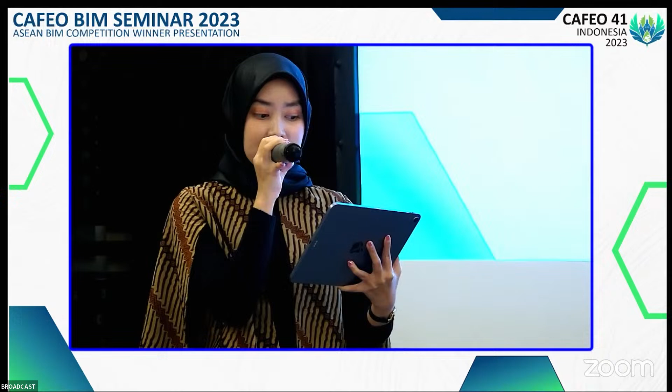Ladies and gentlemen, now we are moving to the opening speech from Mr. Insinyur Bambang Guritno as the General Secretary of PII, Persatuan Insinyur Indonesia. Please welcome Mr. Bambang Guritno.

Bismillahirrahmanirrahim. Assalamualaikum warahmatullahi wabarakatuh. Very good morning to everybody, distinguished guests, participants of the BIM competition, and especially our colleagues from ASEAN countries.

I'm very delighted to stand here on behalf of the President of PII, and also, I guess, the Civil Engineering Chapter of PII, who was supposed to be here, but unfortunately there are many activities taking place at the same time in different rooms. Also, I have to apologize that I came here a bit late, because I had to be a witness for the signing of the MOU ceremony with the China Society of Engineers.

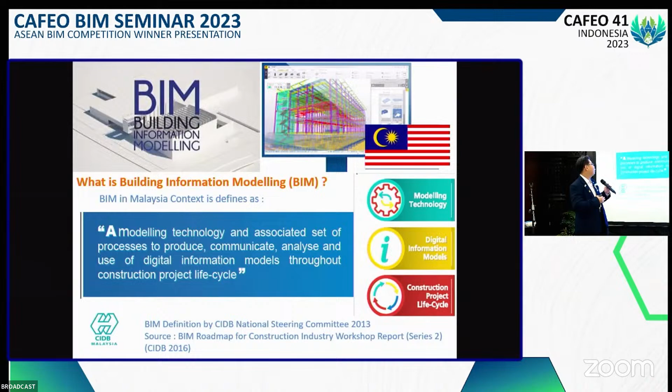So we use BIM for the whole project life cycle. In Malaysia, we have our Construction Industry Development Board, which has a strategic plan for the development of our 4th Industrial Revolution, and BIM is one of the 12 emerging technologies in this strategic policy.

Besides our Construction Industry Development Board, we also have JKR, our Public Works Department in Malaysia, which has strategic plans to adopt BIM at the government level. The government has mandated that for government projects of 10 million and above, they will start with 50% from 2021 needing to adopt BIM, increasing 10% every year. So this is our Malaysia government policy.

Although we have so much policy, our Construction Industry Development Board did a survey showing that BIM adoption in Malaysia in 2021 was only 55%. Compared to the US, UK, Canada, Denmark, Singapore, and Hong Kong, who are all between 70 to 80%, we are still considered low. Our Malaysia government actually wants to achieve at least 80% BIM adoption and above, so we are still considered low compared to those developed countries.

So this study comes in timely, because we want to establish the critical factors from technological, personal competency, and organization's commitment towards company readiness to adopt BIM. This is the purpose of the study - we want to see what factors are affecting BIM adoption. So why is this study important? Why do we need to do this study?

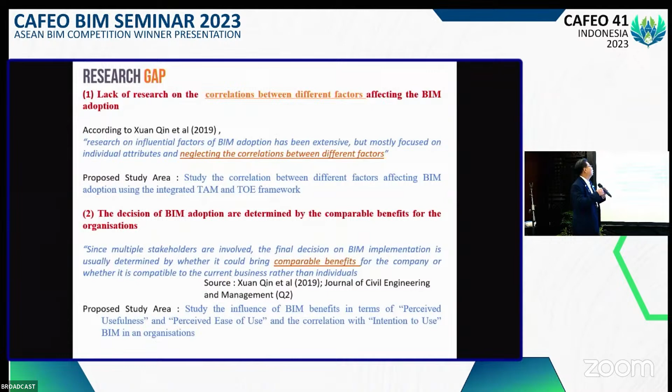So this is where we also found that decisions to adopt BIM are usually determined by comparable benefits, whether BIM benefits the organization. So we also studied the benefits of BIM, looking at the correlation between the factors and the benefits.

This study is considered a cross-sectional study. We are only studying this at the current time, 2023. The target respondents are architectural, engineering and construction stakeholders in Malaysia.

We have done a lot of literature review on the benefits of BIM, and from various reviews we can conclude that the benefits of BIM can be categorized into three categories: productivity and design, project management and constructability, and facilities space management and project life cycle. These are the three main benefits.

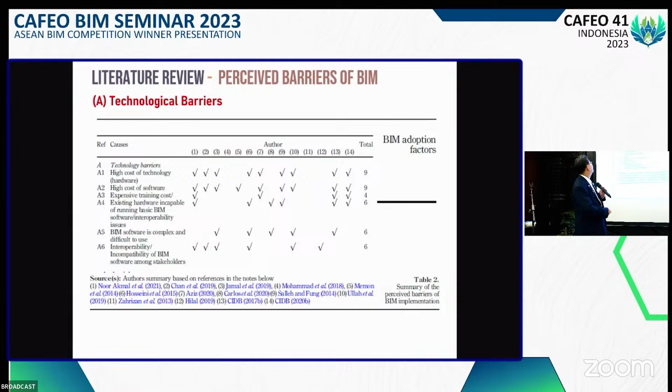We also looked into the barriers - why people do not adopt BIM. From the literature review, we see that the barriers are mostly technological, people, and process barriers - lack of knowledge, organizational barriers, resistance to change, workflow issues.

So the barriers we identified are technological, people and process. This is also consistent with the study by our Construction Industry Development Board, who identified the same three categories of barriers - technological, people and process - in the adoption of BIM.

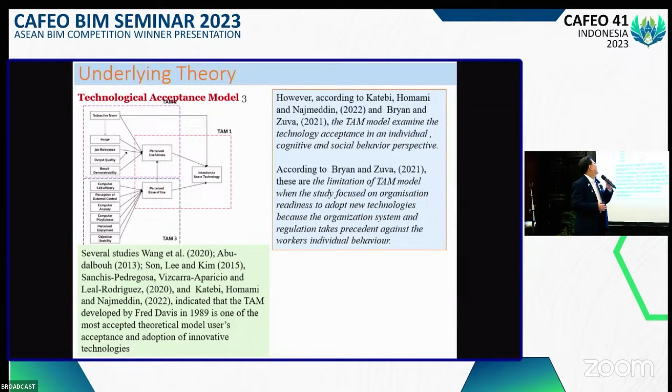But which barriers are more important? How are they related to company readiness to adopt BIM? That is where we wanted to use established models. We have two established models in this study: one is the Technology Acceptance Model, and another underpinning theory is the Technology-Organization-Environment framework.

But both of these models actually have their own shortcomings. So in this study, we combined the two underpinning models into one new conceptual framework, which we call the Technology Acceptance Framework. This framework can be used to study any new technology adoption.

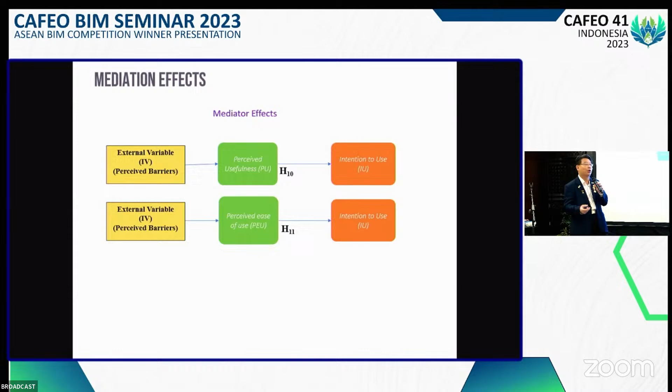So we conducted a hypothesis study to find the correlation between these factors and whether companies are adopting BIM based on these factors. We also did mediation analysis for perceived usefulness and perceived ease of use of BIM - whether BIM is easy to use and whether it's useful. So we will study this relationship.

This research is basically a quantitative study where we conducted it using a questionnaire survey, and we collected more than 185 questionnaires from various respondents - architects, engineers, and consultants. Our respondents also include clients, consultants, M&E, and QS. So we took in all construction stakeholders, and the analysis was done using software called Partial Least Square Structural Equation Modeling, or PLS-SEM, to do the correlation analysis.

From the respondent data, you can see that most respondents are in management - more than 60% are general managers and management level or above. They are the decision makers, and more than 53% have more than 20 years of experience. So the respondents are people in positions to make decisions about whether to adopt BIM in their company.

The result from our study conducted in March and April this year shows that 59.5% of respondents actually adopted BIM in their organizations. This is very consistent with our national government study, where 2016 was 17%, 2019 was 49%, and 2020 was 55%. So 2023 at 59.5% is very consistent with what the government has reported over the years - we only have 3 official reports from the government.

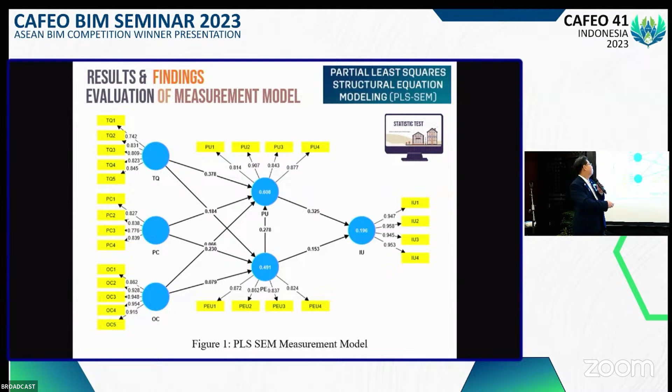We are looking at the correlation, but before using our model, we want to test whether it is reliable and valid. For reliability of the data, we look at Cronbach's alpha test and convergent reliability. Cronbach's alpha for all values are more than 0.8, so they have very good internal consistency.

We also tested for composite reliability, and the values from the statistical analysis show that all values are more than 0.7.

So the internal consistency are acceptable. And then we also make sure that the convergent validity of the construct are related positively to the same construct. So all the AVE values are more than 0.5. So the convergent validity are accepted.

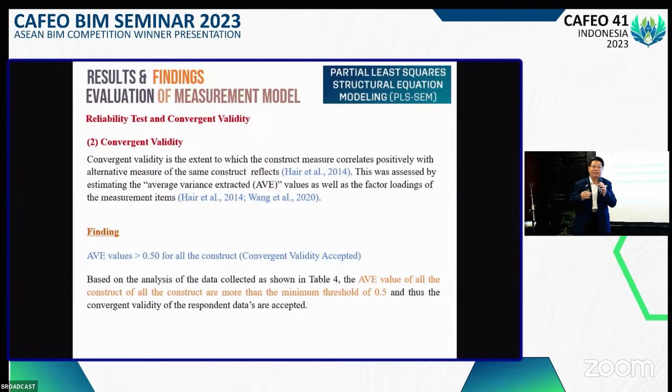And then we also look into discriminant validity. This is done by the HTMT value ratio. And from this, we find that all the HTMT values are less than 0.9, meaning that the discriminant validity of the model is being accepted.

We actually look into multicollinearity issues, whether the models are measuring the actual construct, or they actually measure another variable. Is there any bias or not? So from here, we use the VIF model, variance inflation factor, all are less than 3.3. So there's no common method bias. So the measurements of the construct are not biased.

So that is where we test the validity. So once all the validity and reliability are being tested, and we find that the model are reliable and valid, then we continue to do the hypothesis testing to test whether there is any significant relationship between the factors towards the company's readiness to adopt BIM.

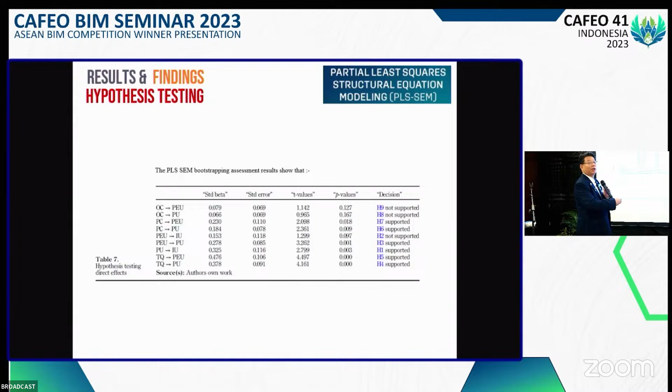So you can see not all are supported. Some of them are supported, some are not supported. And then we do the mediation analysis to see whether there's any mediation between the perceived usefulness and perceived ease of use.

So finally, from the analysis, we actually find out that technological quality and personal competency have more significant relationship with the perceived usefulness and ease of use. And perceived usefulness have a significant relationship with the intention to use.

Perceived usefulness also has a partial mediation of technological quality and personal competency towards the company's readiness or intention to use BIM.

Organization's commitment does not have significance to the perceived usefulness, and perceived ease of use is not significant in the company.

So why is the study very important? It's because this proposed new framework can be used not only to study BIM, but any new technology, AI, IoT, ChatGPT, IBS, modular construction. You can use this conceptual framework to do any study.

So for the promotion of BIM, now we know that technological and personal factors are more important for the adoption by the company. So we should focus more on the incentive for BIM software and hardware, as well as the training to increase the personal competency.

And we also know that the benefit, because the perceived usefulness is important, so we need to highlight the benefit of BIM to the construction industry stakeholders so that they can adopt BIM. So these are the findings.

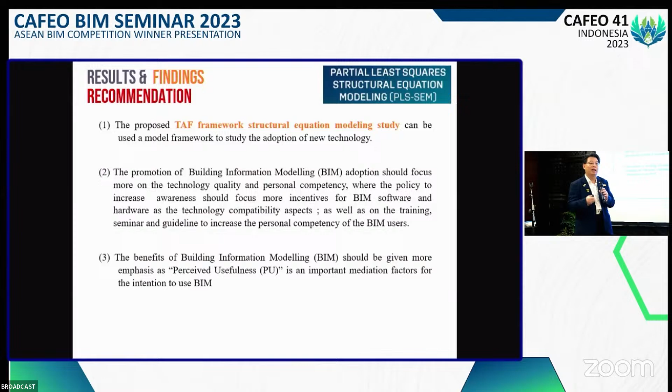And this finding, as we have presented in Malaysia, I think to our JKR just early last month. We also presented this for JKR, and then we have also been published in high-ranking journals and also IET's book, and also we have presented this BIM finding last year in Cambodia and also in Vietnam, and in some journals as well.

So with that, I thank everyone for listening.

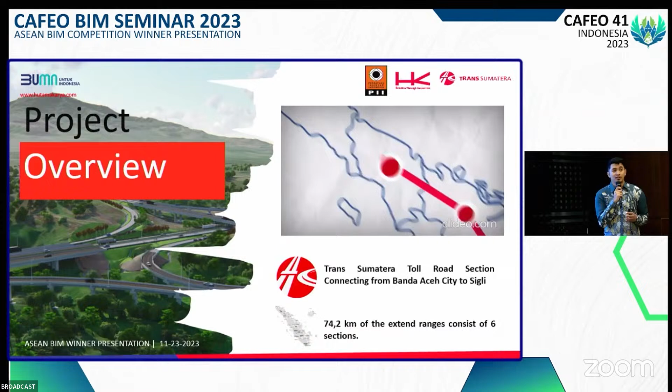The Sigli Banda Aceh Toll Road Project has a length of 74.2 kilometers, divided into 6 sections. Nowadays it is fully operated from Seulimeum in section 2 to Baitu Salam in section 6, around 46 kilometers. Section 1 is under construction and expected to be completed by the first quarter of 2024. The toll road can reduce travel time from 2-3 hours to just 1 hour.

Who are the stakeholders involved in the project? The first one is, of course, Hutama Karya itself, as the owner of the project, with an obligation to manage the construction process and the operation as well as the maintenance of the toll road.

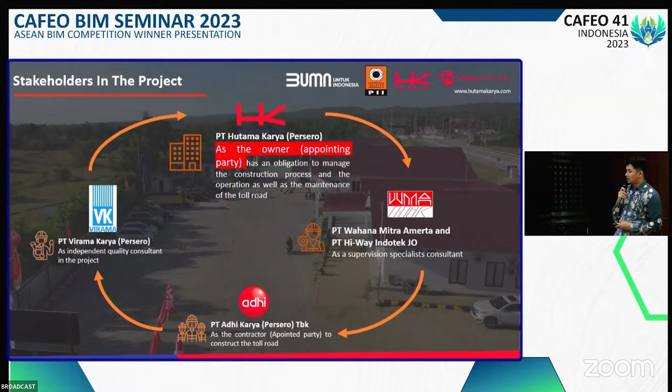Second, we have two independent consultants: Wahana Mitra Amerta and Hi-Way Indotek JO as supervision specialist consultants, and Virama Karya as independent quality consultant. And to complete the project life cycle, our partner in the Sigli Banda Aceh Toll Road Project is Adhi Karya, our main contractor, with the role of constructing the toll road.

Okay, let's move to part 2. How is BIM and digital construction implemented in the Sigli Banda Aceh Toll Road Project? Before we talk about the implementation, we have to know the condition of the project. It has a 74.2 kilometers length and a complex scope of work, with so many items that must be modeled and completed within 1,890 days.

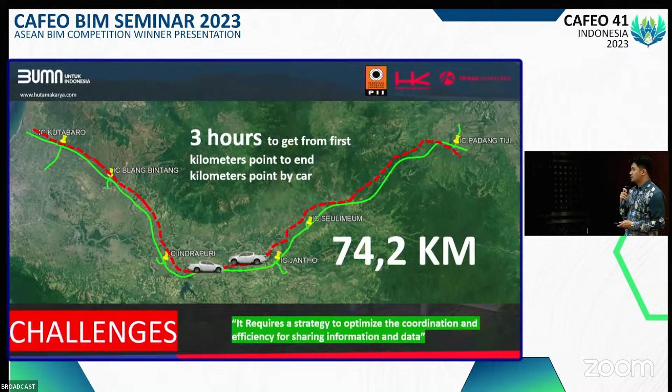1,890 days — sorry. This requires acceleration of the design process. Second, the 74.2 kilometer length makes coordination and mobility take longer; it takes up to 3 hours to get from the first kilometer point to the end kilometer point by car. This requires a strategy to optimize coordination and efficiency for sharing data and information between stakeholders.

Sumatra Island is one of the islands in Indonesia that is an animal habitat and protection forest. But the fact is, 9,700 hectares has been deforested, especially in Aceh province, reducing the animal population in Sumatra. So the Aceh government and Natural Resources Conservation Center requested us to accommodate the animal habitats affected by the toll road construction, so we need to modify several designs to accommodate it.

Hutama Karya has collaborated with other institutions to enhance the design, and appointed Adhi Karya, our main contractor, to adjust and develop several crossing designs to accommodate the animals. First, we have an elephant crossing, allowing access from one side to the other through the bottom of the bridge.

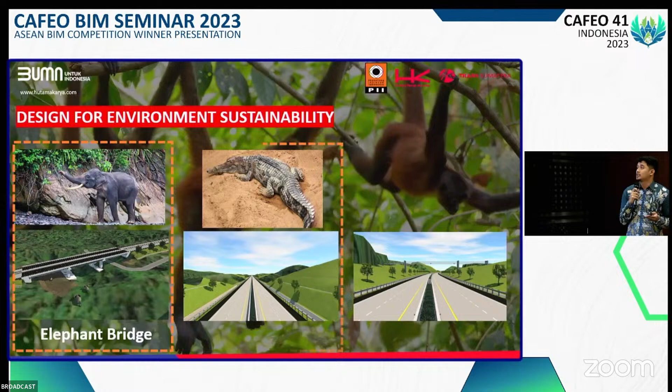Second, we have reptile tunnels, changing or modifying the bottom of the box culvert to match the humidity of the reptile habitat. And last, we have an overpass for primate crossing, which is the most unique animal crossing accommodation, initiated for the first time in Indonesia. As a result, Hutama Karya is concerned with protecting the animals and the sustainability of the animal habitat surrounding the toll road project.

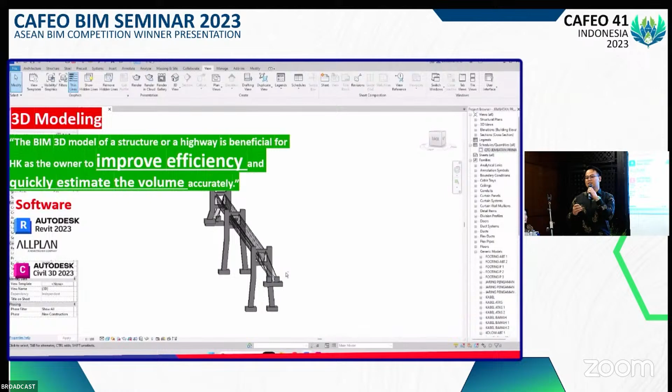To face this problem, digital construction and building information modeling is the best approach that we should implement in our project. If we talk about BIM, let's start by talking about 3D modeling. 3D modeling is not just a 3D model, it's also a model rich with information regarding graphical and non-graphical information.

So with the implementation of 3D modeling in our project, Hutama Karya as owner can improve efficiency and quickly estimate the volume accurately.

And then we move to 4D scheduling. We also agreed, as project practitioners, that one of the constraints in project management is schedule management. With 4D scheduling, we can visualize the schedule and create the schedule baseline in our project. This increases efficiency through visual schedule simulation, developed from the 3D model of the work schedule, simulating each stage.

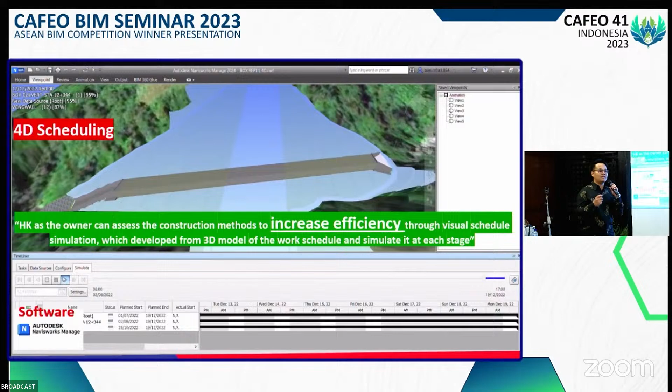And then we're talking about 5D quantity takeoff. Also with the 3D model, we can automatically generate volume for this model, which becomes the volume baseline for our project. This is beneficial for us as owner to get control of our cost, and this also makes us 55% faster in volume computation in our project.

And then we're talking about 3D visualization, also accurately, and definitely this feature can make stakeholders in our project understand the design overview and observe the toll road plan model that has been constructed.

Also, asset information modeling. We as owner need to manage our asset and deliver it to the operation division. So we instruct the contractor to create LOD 500 and we get comprehensive information regarding the data attributes. With this BIM feature, we can get an easier asset management process after the handover process.

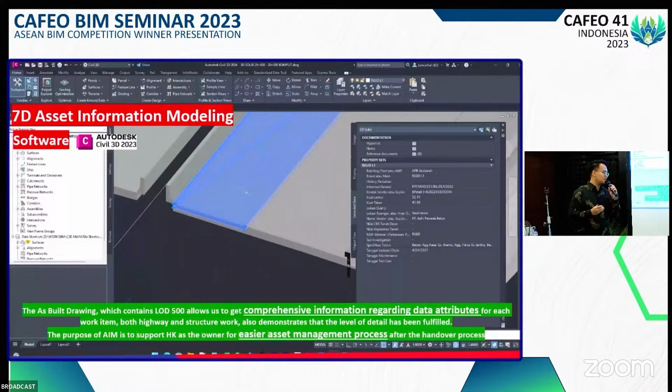Next, as the owner, we want to make better documentation of our project. So here we use common data environment with BIM 360 Docs as a coordination tool between stakeholders, both office and field. As a regulator, we make a decision to instruct the contractor to submit the model in building information modeling form, like 5D model, 3D model, 2D drawing, and other models, and then the consultant reviews and assists that.

Also, digital survey using the photogrammetry method has been beneficial for us, providing 19% time efficiency, quicker than using a total station.

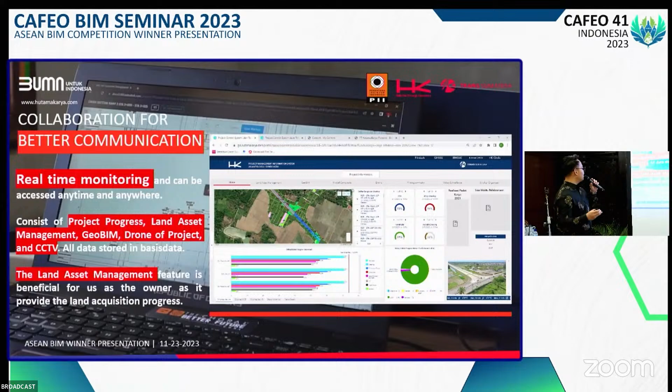And last but not least is the project management information system. We use this dashboard for real-time monitoring, such as project progress, land asset management, and CCTV.

Okay, now we are in the last part. So Hutama Karya, as the owner of the project, has so many benefits. As a summary, we can conclude that first, Hutama Karya as owner can receive all documents, either shop drawing data, volume estimation, and other data from our stakeholders faster than manual methods, with time efficiency up to 60%.

Second, the implementation of digital construction in our project enhances the coordination process between stakeholders, making it more efficient and more effective, with time saving up to 4% during the construction phase.

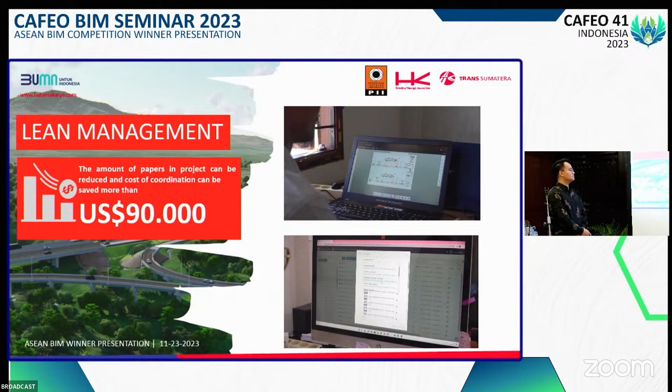Third, the amount of paper in our project can be reduced, and cost of coordination can be saved by more than 90,000 US dollars, or equal to 1.3 billion rupiah.

And last but not least, as we said before, regarding the sustainability of animal habitats, utilization of BIM and digital construction will assist stakeholders in making the best decisions to accommodate animal habitats affected by the tollway construction, such as modification of elephant bridges or elephant crossings, reptile tunnels, and the most unique animal accommodation, initiated for the first time in Indonesia, which we call the primate crossing. As a result, Hutama Karya has committed and collaborated with other institutions concerned with protecting the sustainability of animal habitats surrounding the tollway project.

So that's all from us, and maybe we have a last statement in our presentation. We hope our presentation can inspire other institutions, especially in Indonesia, to be aware of and concerned about the sustainability of the ecosystem surrounding their projects.

And the Sigli Banda Aceh Toll Road project has proven that all stakeholders have responsibility, have to play their roles, each their own role, to make the best collaboration, the best communication, the best coordination, and make it more efficient and more effective for the implementation of BIM and digital construction in this digital transformation era. So that's enough.

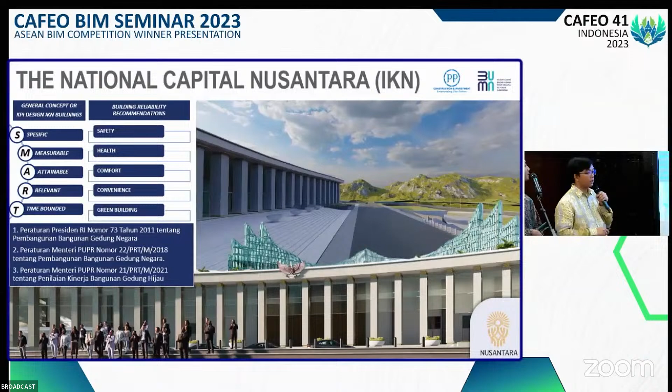This project contract is design and build with lump sum fixed price, with the target completion as per contract at the end of October 2024. But Mr. President gave us a special milestone to complete before 17 August 2024, which is the Independence Day of the Republic of Indonesia, the 79th anniversary. The scope of work in our project is planning design, structure, architecture, interior, landscape, infrastructure, and green building and smart building.

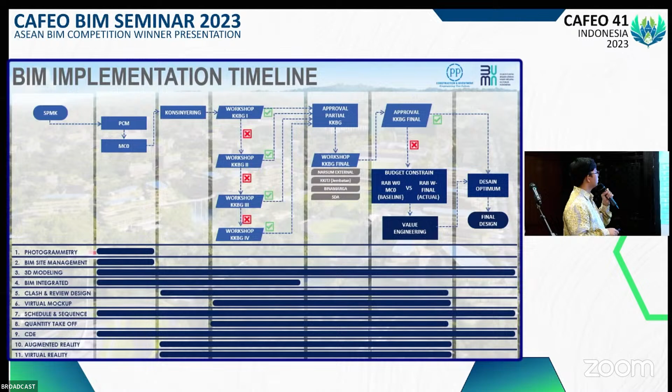Next, this one is the implementation timeline of BIM itself. Here I will tell about the process of final design that we are proposing to our owner. From the start of the project, there is a PCM, pre-construction meeting, and at this step the program of BIM implementation is photogrammetry and site management. It really helped a lot to get an overview of the existing contour. And the next step was konsinyering.

So the next step was approval from a special committee from the Ministry of Public Housing. There are two committees, KKBG, or Komite Keandalan Bangunan Gedung, and KKJTJ, Komite Keandalan untuk Pembangunan Jembatan. Next, after approval from the workshop itself, from structure, MEP, and architecture, there is a final approval.

Then after that, we provide the budget constraint about the estimator engineer, then do value engineering for the optimum design. The BIM implementation itself has 11 steps following the process until the final design. So here I can say there is a lot of collaboration in BIM implementation that happened in our project.

In our project we use many regulations, including implementation regulatory standards such as Government Regulation Number 16 of 2021, and the Public Works and Public Housing Regulation Number 22/PRT/M/2018. Additionally, we have ISO 19650 certification which PTPP has obtained. At the commencement of the project, the owner provided requirements outlined in the EIR, which we followed with the BEP, or BIM Execution Plan. Our company regulation about BIM is under PP Dev Strateg P 014.

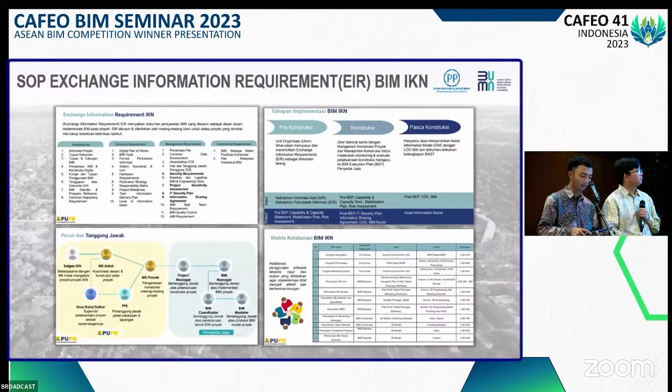The following picture is an example of an EIR, or Exchange Information Requirements, in our project. This is the requirement provided by the owner of our project, and to answer this requirement we responded with the BIM Execution Plan, or BEP. With this, we can answer the requirements from the owner.

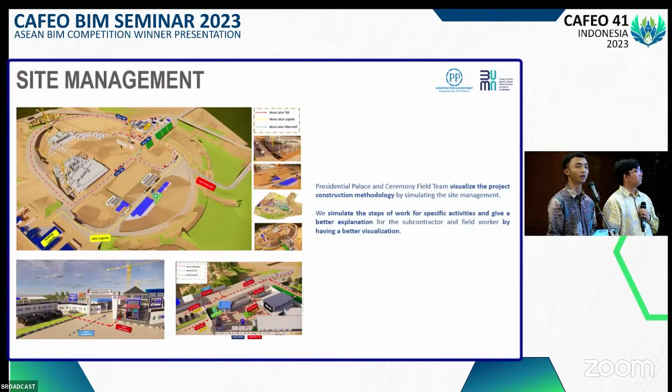We also use BIM for site management, to visualize the project construction methodology by simulating the site management, as shown in the following picture. We simulate the steps of work for specific activities and give a better explanation for the subcontractor and field worker by having a better visualization.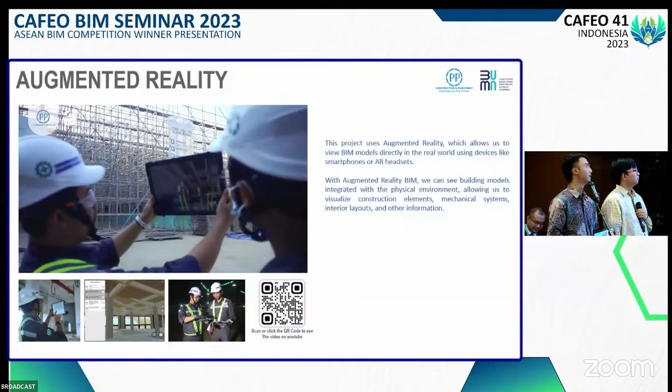This is augmented reality too, but here we use a QR code to see our design, our 3D design, by scanning the QR code with a device like a phone or tablet.

IKN has multiple construction projects running, including the National Palace project and so many others. Our projects in IKN integrate data through the Common Data Environment, or CDE, to enable access and collaboration, so we can resolve our clash detection reports and more. The CDE is very important to us.

The second point is our BIM integration, which lets us get a more precise visualization of the IKN area. This allows us to identify potential conflicts or clashes between building elements before construction occurs.

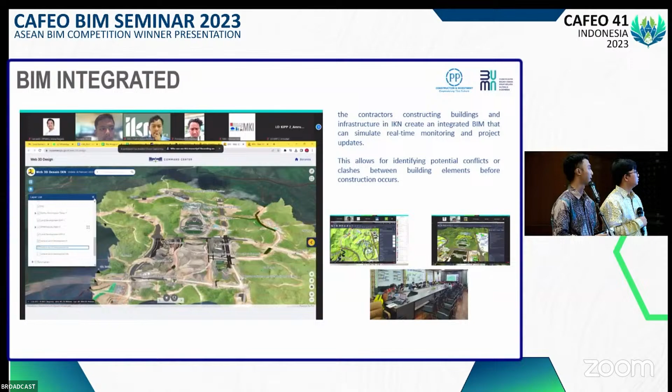So for the conclusion of our presentation is benefit cost ratio. By comparing the use of BIM with conventional methods such as contour survey method, building analysis, building representation, building visualization, project schedule presentation, presentation of project data, and waste management, we can get a benefit cost ratio of 6.60. When the benefit cost ratio exceeds 1, the benefits outweigh the cost incurred to achieve those benefits. So this one is very good.

The next one is our BIM implementation in our project. The Presidential Palace and Ceremony Field Construction Project is located in IKN, Ibu Kota Negara, Indonesian language for New State Capital, near Nusantara. The city has the concept of an intelligent city, which creates interconnected cities with technology's role in creating efficient, innovative, and inclusive management of urban core functions.

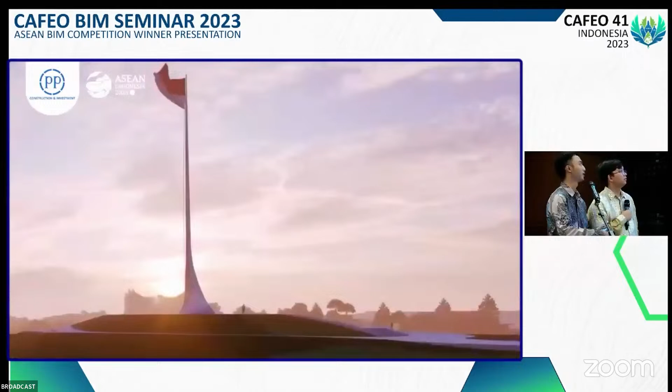So this one is our construction project, and that was the president office, the Garuda. This building is designed with a monumental and symmetrical appearance that is dominantly implemented on the front face of the palace, with tall pillars totaling 34, representing the 34 provinces of Indonesia.

This building is targeted to be completed on the anniversary of Indonesia's independence, August 17, 2024. A particular strategy is needed for accelerated implementation to achieve the target.

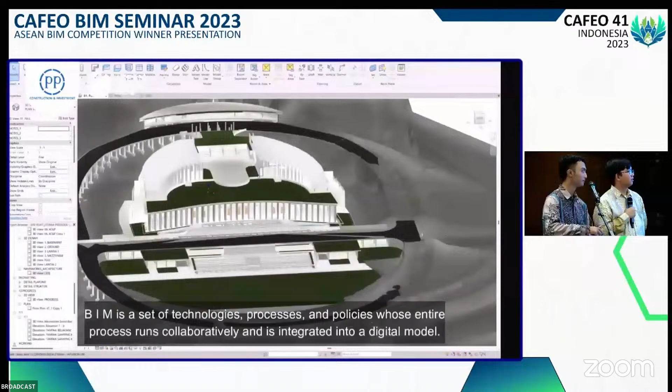Building information modeling is a set of technologies, processes, and policies whose entire process runs collaboratively and is integrated into a digital model. Therefore, PTPP, the main contractor for this project, has been implementing Building Information Modeling, BIM, since the beginning of the project. It is also in line with the mandate from the Ministry of Public Works and Housing of the Republic of Indonesia, as one of the efforts to win in global competition by improving the quality of work with cheaper, faster, and better deliveries.

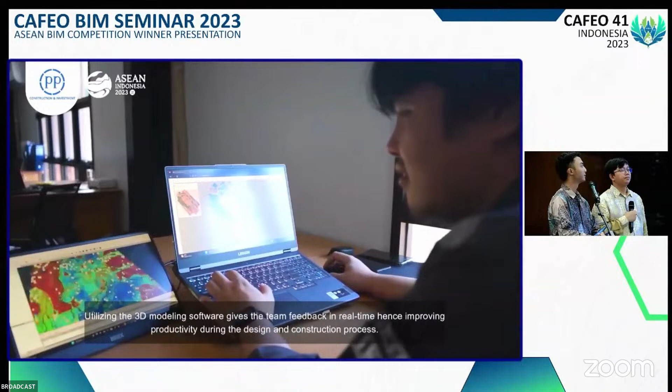This is what we implemented in our project: managing project data and information throughout the project lifecycle. Utilizing 3D modeling software gives the team feedback in real time, hence improving productivity during the design and construction process. This process generates our BIM 4D, geometry, spatial coordination, mapping progress, and even the numbers and characteristics of the building components.

And this one is our 3D modeling in our project. Building information modeling's contribution to the design process includes detailing more aspects of structural, architectural, and mechanical electrical. Also, from our experience documenting the implementation of BIM, it really offers various benefits such as better visualization and better coordination.

And then, as we believe, by balancing people, process, and technology, it is really essential for sustainable digital transformation. I think that's all that we can share with you all. Thank you for the attention. Assalamualaikum warahmatullahi wabarakatuh.

Sino-Thai Holding is an investment arm of STECON, and I have been a structural design and BIM manager in STECON for 9 years. STECON developed 3D from CAD modeling to BIM. Since 2013, BIM for construction projects were implemented in Thailand. Construction project use BIM to facilitate work. However, design and construction projects have been executed recently to promote better BIM uses.

Today, with focus on monorail, I have divided my presentation into three main parts: first, introduction; second, BIM goal; and third, BIM implementation.

Monorail is a standardized system. The MRT Pink Line project runs from Nonthaburi Civic Center station to Minburi station, about 35 kilometers, and the MRT Yellow Line project runs from Rashada station to Samrong station, about 30 kilometers.

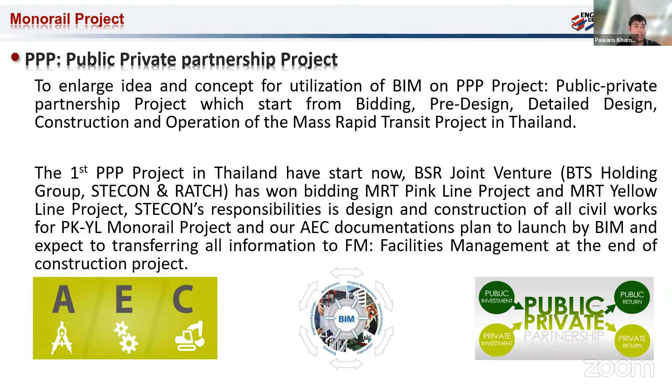Do you know BIM? I think BIM is not a file format or software application. BIM is a holistic process of creating and managing information for built assets.

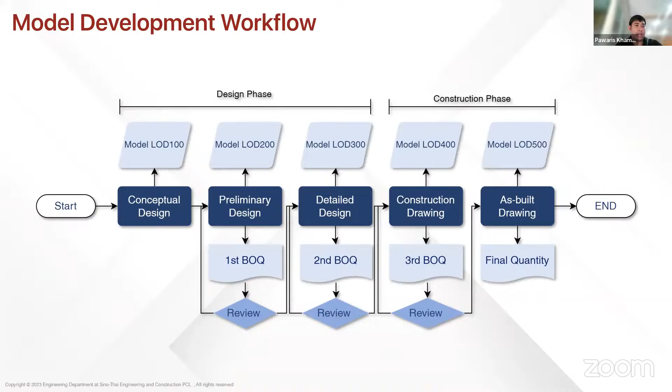The development workflow follows the BIM model according to the BIM goal established for each stage. Each stage was evaluated by stakeholders in terms of investment potential and appropriateness for engineering.

BIM goals for the project are very, very important. The BIM goal for the monorail project prioritizes design highly. The utilization of BIM technology spans from the conceptual design stage to the construction stage, in accordance with standards and regulations.

Coordination is a high priority — the process of clash detection to identify conflicts in the design and construction limitations. Visualization and estimation are medium priority.

I have divided BIM implementation into 5 main parts: 3D geometry, parametric modeling, coordination, collection management, and visualization. I think each program offers unique features, and second, we can use them for our owner's requirements, or we propose to use them.

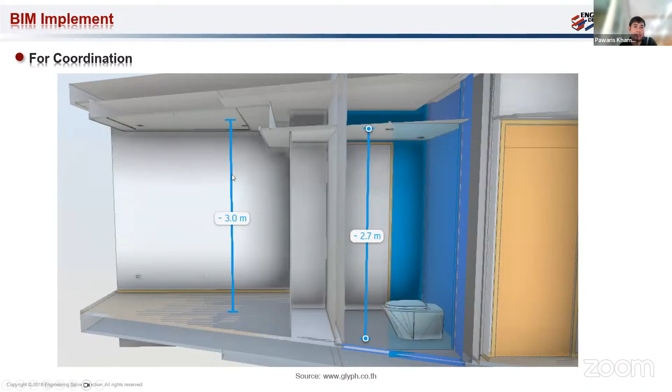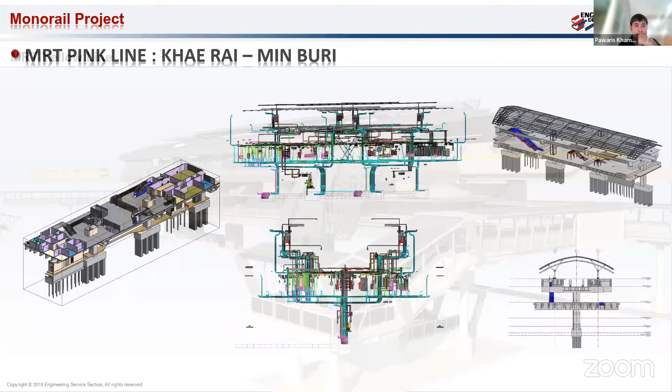This is the MRT Pink Line station. The collaboration in the station follows the same path line.

So let me introduce each program of work. Basically, we use modeling and construction drawing for the Pink Line station. The same path line applies here, showing the station of the Yellow Line.

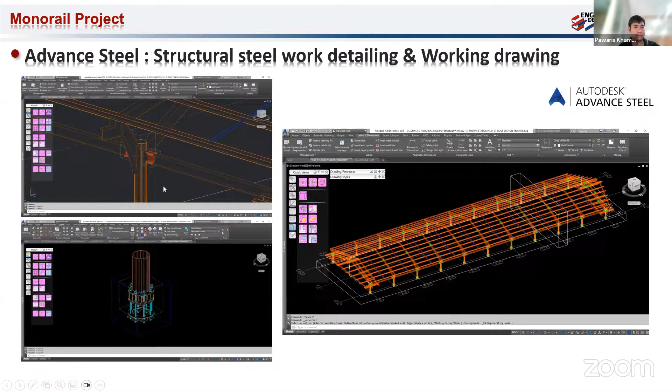We use Advance Steel for the steel work detailing, and we use Navisworks for clash detection and collaboration, and we use Civil 3D for the alignment design and topographic collaboration.

The key of the monorail project, I think, is the construction reference drawing, or CRD. CRD sits between the detail design and construction drawing for the project, transforming the design state into the construction state.

Objectives are model coordination, or clash detection, combining all disciplines such as architecture, structure, and building service, and reducing clashes and defects functionally.

It also helps explain complex details in construction drawings. We selected the MRT Yellow Line station — for example, the traction room — as a complex case of building service work to explain complex details.

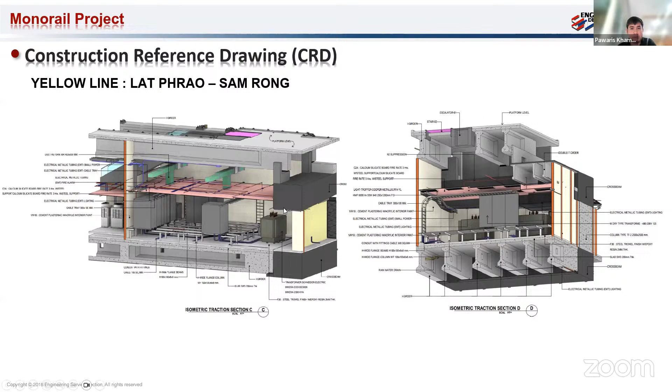Here's another view of the CRD. For elevated structure, I use CRD for the clearance between rebar and precast, and pre-stressing.

Thank you for your time.

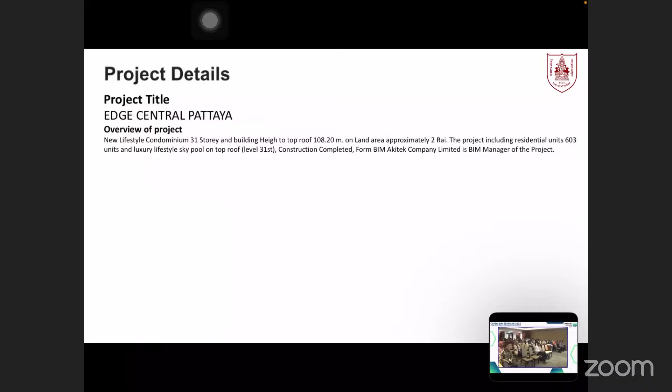Central Pattaya is a new lifestyle condominium from Sansiri. The project has 31 stories with a building height to the top roof of 108.2 meters, on a land area of approximately 3,200 square meters. In our project, we use BIM from design stage until handover to the client for operation.

In the maintenance period, we use Autodesk Revit to implement the model and generate 2D drawings for our team's work. We use Navisworks and BIM Collab to coordinate work within the team. We also use a common data environment via BIM 360 for collaboration. This project can be called a prototype, a footprint for the next project.

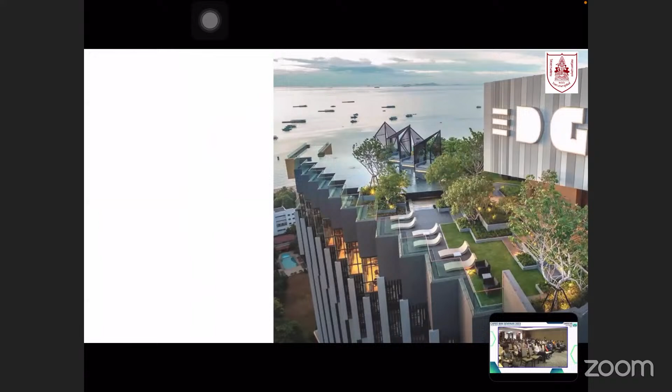Central Pattaya represents a digital transformation from the previous process to a new era process. All of the building area can take in panoramic sea views and offers high luxury service for all users in the project. We can capture panoramic views in all areas.

Inside, it looks luxurious for the service to users in the building. We moved from local storage to cloud storage, from 2D coordination to 3D coordination, and won a BIM award.

From design to construction works, we tried to collaborate on our project schedule. The project was completed before the end of schedule, around 2 months early. This shows the project starting at design stage, and then handing over to the contractor.

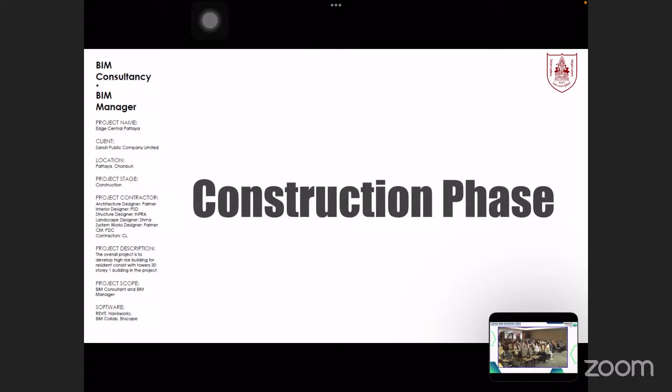In the construction phase, we use BIM from the design stage to update the model and data in the model for collaboration, and input data from the construction work to be used at the end of the project in the operation system.

We can do it together, the BIM team of the project. Of course, we did this together with our team, consisting of architecture and building system design by Palmer and Turner Thailand, structure design by Infra Group, landscape design by Shma, interior design by Paradigm Chip, and contractor by Construction Line. Project management by Project Direction, and also I am the BIM manager from BIM Architect.

In the project, we use every stage in the common data environment. We use BIM 360 for working on the project throughout all stages of the project.

Before the project starts, we implement the BIM execution plan. The BIM execution plan manages our team to implement BIM for the team or the state. We create workflow to involve parties in the project, and we create processes to make a great model, and the project time frame too.

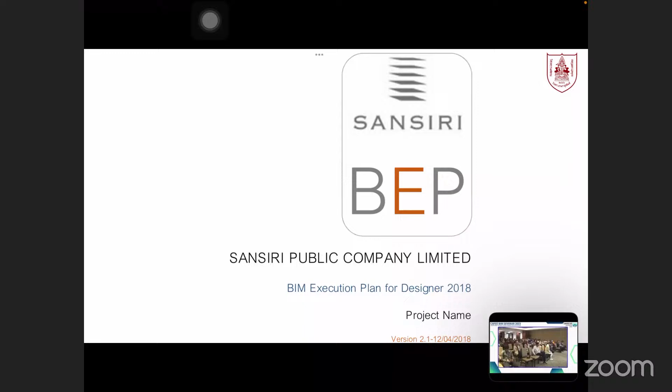For the project workflow, we set the workflow from the start to the design stage and the construction stage, and we send the model to the post construction. In the post construction phase, the model includes details of the assets and objects, and

the operator can use the data for operating the BMS in the project building. We make the federation model by setting the process for the federation model and the level of information needed in the model at each project phase. We set every process for the project before it starts.

When the designer is involved in our team, they can use the BEP and take time for working, or the time frame for collaboration in our work. We set the process for collaboration and inputting the data.

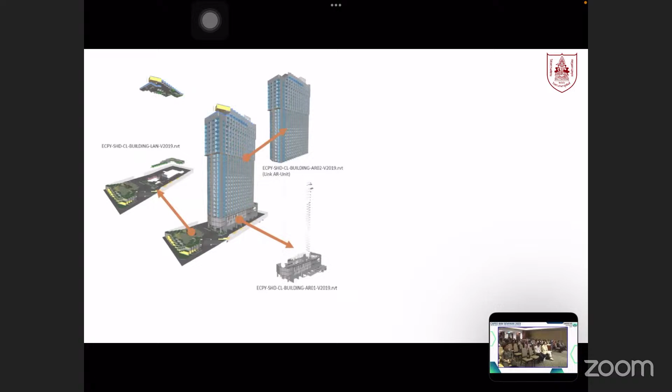The Edge Central Pattaya project. We set the model as a process, setting the process model at each level.

We create the model parts such as the ARC model. We create the model for the facade, the landscape area, and the main object building. For structure, we set the model including the underground, tower, podium, and crown model, and also

in the system works, we set the system works and the model too. We separate the systems by pipe, electrical system, and mechanical system, and we filter by shading on the object and input the data in every object in the model.

We can find everything in the data from the model by exporting data to the team for the operation system after handover to the client, and the maintenance team can use the model for maintenance at all times after project completion.

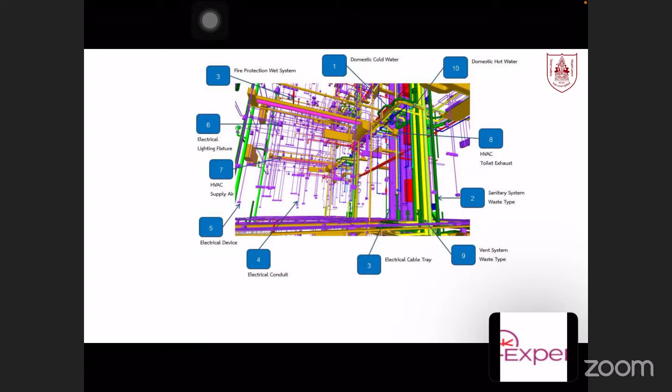When the project completes, we bring all the models together to federate the project on a cloud system on BIM 360, and everybody can find everything in the common data environment. We keep data in the common data environment in BIM 360 at all times.

Everybody can use BIM 360 to find everything in the model, such as sheets, drawings, model parts, access, and everything such as the ceiling level height, the clear height, and the system in the model. In some areas we can find

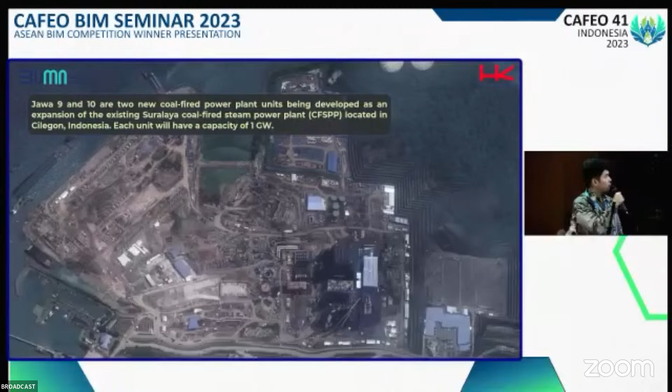Each unit will have a capacity of around 1 gigawatt per unit. The duration of the project is around 54 months, with a project value of 1.2 billion US dollars.

This project has a 60 hectare coverage area, and there are several areas such as the power block, AIS or air-insulated switchyard, balance of plants, coal handling system, seawater intake, outfall, and the last one is the jetty.

And this project is being constructed by Doosan as the Korean contractor, and Hutama Karya as the national contractor. This project is also owned by Indoraya Tenaga, a subsidiary of PLN.

So to achieve these goals, BIM has a role throughout the project, from engineering analysis to operation and maintenance. The flow is: first step is preparation, next is digital survey known as photogrammetric and orthomosaic. Third is 6D engineering analysis, 3D modeling, 4D scheduling and clash checking, 5D for quantity, material, volume and budget, and opnam, 7D common data environment, and the last one is operation and maintenance.

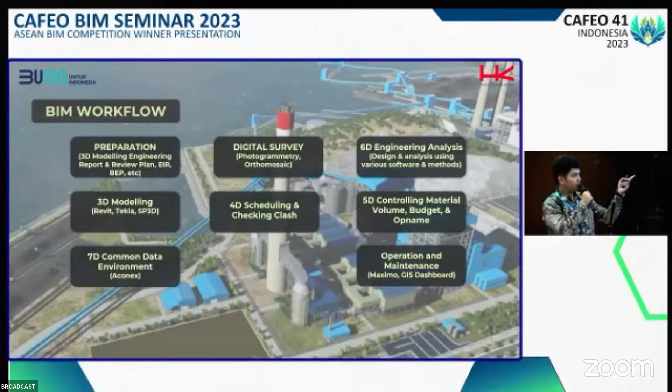So this is a brief overview of our project. It's quite big, yeah.

As the first step, preparation, we have to prepare documents regarding BIM, such as contract documents, EIR, BEP, and so on. It has to be assigned by each stakeholder, from the owner, contractor, vendors, and so on. Also, we have to prepare a 3D modeling engineering report and review plan for the owner covering 3D modeling, generating 2D shop drawings, 4D scheduling, 5D, 6D, and 7D operation and maintenance.

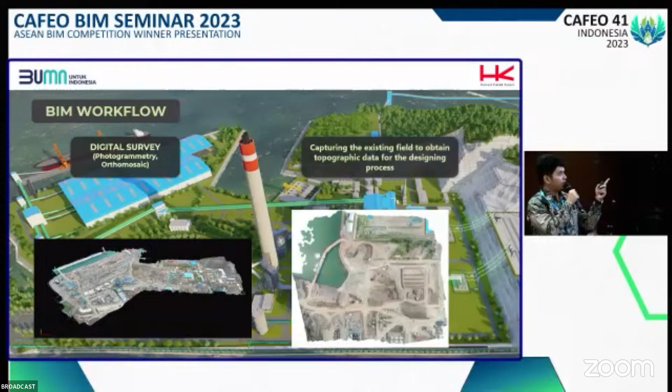The next step is we conduct a digital survey to obtain existing field topographic data for the designing process.

And next, we do the 6D engineering analysis. Because our project is an EPC project, we do the engineering analysis first, then after that we do the 3D modeling. For the engineering analysis, we conduct it to achieve great quality and to be qualified for international codes and standards. We use several software such as ANSYS, StaadPro, and SAP2000 for designing that.

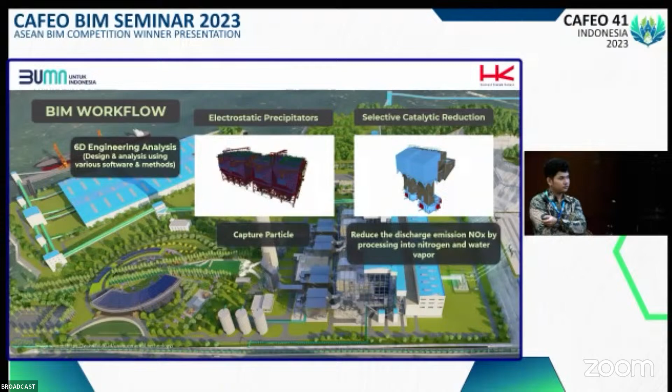This is the total overview for reducing air pollution: flue gas desulfurization, then it goes to the gas filter, then to the ESP and SCR. Then the gas will go out from the chimney, and our chimney, for information, is one of the highest chimneys in Indonesia.

We continue. This is for the other issue regarding water pollution, because sometimes coal will be dropped during conveying to the mill, and there is a possibility that the water will contain coal.

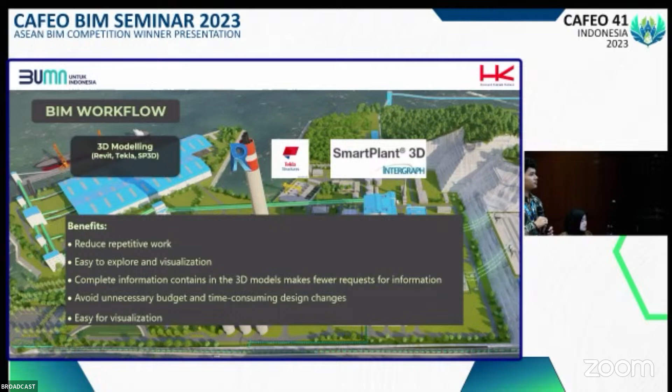For 3D modeling, we use several software, for example, Revit, and for the steel structure, Tekla. This is an example of 3D modeling for the coal-contaminated drainage and the settling pond, prior to the wastewater treatment.

For the 3D modeling report, we separate it into 4 steps: first 30%, 60%, 90%, and the last is the final as-built deployment.

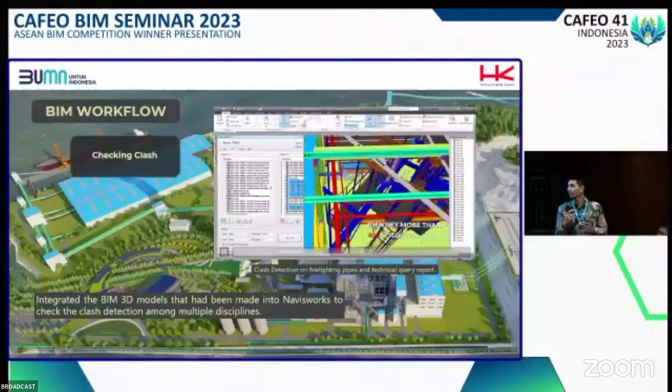After we do the 3D modeling, we compare it with other disciplines and check for clashes. This is an example: checking clashes for firefighting with steel structure members, more than 400 clashes were found. After that, the clashes are conveyed to the consultant and also to the vendor.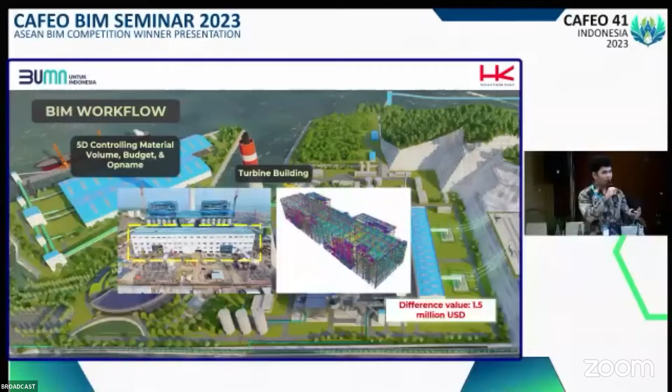Also in our project, we had a challenge: there were miscalculations regarding volume, and we had to recalculate it. We used Tekla to speed up the calculation process, and we found a difference in value of up to $1.5 million. We know the value we got is quite large compared to the initial contract. But here's the thing: if we were not using BIM, we wouldn't know how much the value actually is, and we would be absolutely wasting time just recalculating.

And also we use 5D calculation for invoicing to the vendors. Here's an example invoicing steel structure to the vendor. There are Martamas Agra Andalan.

Okay, so the next is common data environment. So we have a lot of stakeholders. There are Indoraya Tenaga as an owner, and TEPSCO and Konusa as owner's engineers. There's also HK and Doosan as the EPC consortium and other subcontractors.

To implement BIM in this project, we use Oracle Aconex as a common data environment for better communication and collaboration, from reviewing, approval, and archiving documents.

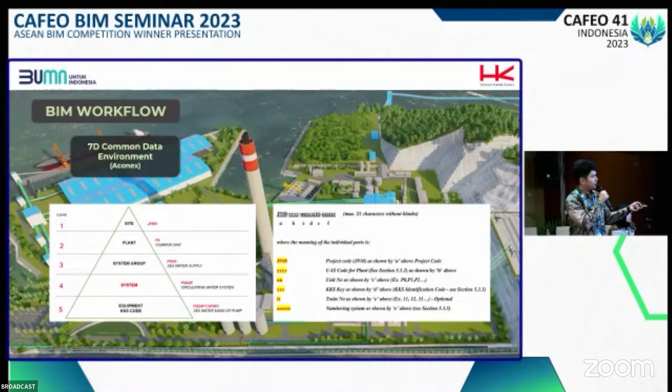And also for the federation plan, we implement some numbering systems. There are project code, UAS code for plants, unit, KKS code, and system, and also equipment KKS code. And it refers to a system, building, and equipment.

So in our project, more than 60,000 documents are reviewed. By using CDE, we can reduce the use of paper, so as a result, green economy can be implemented.

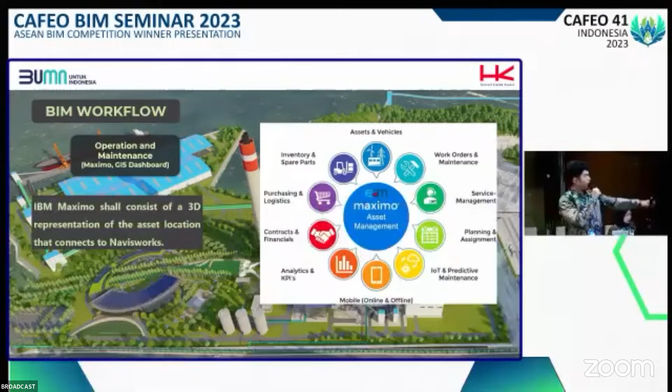So for operation and maintenance, we're using IBM Maximo, which shall consist of a 3D representation of the asset location that converts and connects to Navisworks. There are several functions such as contract and financial and so on. And of course there's also parent, location, vendors, manufacturer, serial number, and failure class.

So here's an example, by inputting the information, the non-graphical data into the models. And here's the...

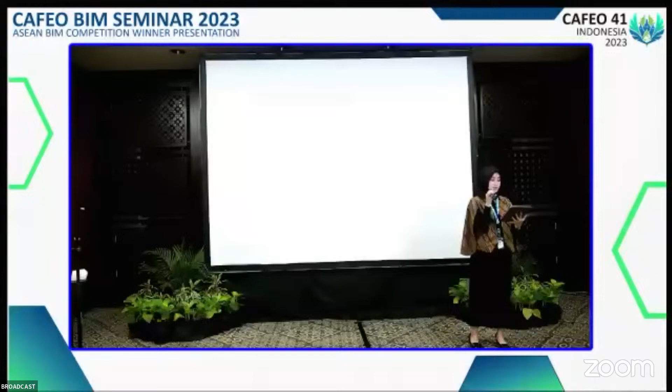All right, and now we will announce the winner of ASEAN BIM Competition 2023.

The first one, we will announce the favorite winner of ASEAN BIM Competition. Congratulations for Mr. Wong Chifui from University of Tunku Abdul Rahman, Malaysia.

For Mr. Andi, you may award it. Please, Pak Firman, Mr. Chofong, Pak Andi Taufik Prof. and Agus, also Pak dari Haka, Pak Harsoyo ada. Pak Harsoyo, please.

Mewakili BK Sipil, Pak. Pak Harsoyo, silakan, Pak. Nanti Pak Harsoyo. Silakan Pak Harsoyo. Ya, oke.

Okay, yeah, you can move to the center please. Sorry sir, can you move to the center? To your right. Okay. One more step to the right. Okay.

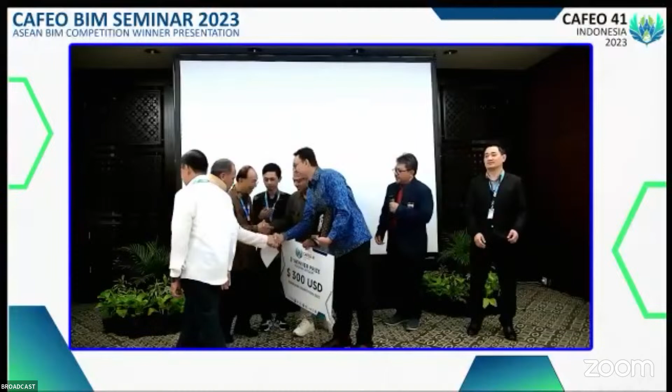And Mr. Handrianto, you may join us in front of the stage.

Okay, so next we move to the second winner of the building category, awarded to IT Mandiri Bumi Slipi project from PT Pembangunan Perumahan Persero Tbk.

Congratulations for PT Pembangunan Perumahan, and for the project team, you may join us today in front of the stage, and also Mr. Joko Raharjo as the General Manager of Building Division from PT Pembangunan Perumahan Persero Tbk.

Okay, and the award will be given by Mr. Hendrianto. Okay, so please give a big applause for PT Pembangunan Perumahan. Congratulations once again.

Okay, so for the documentation team, you may take this moment together. Okay, thank you so much for the team. Please give a big applause for PT Pembangunan Perumahan.

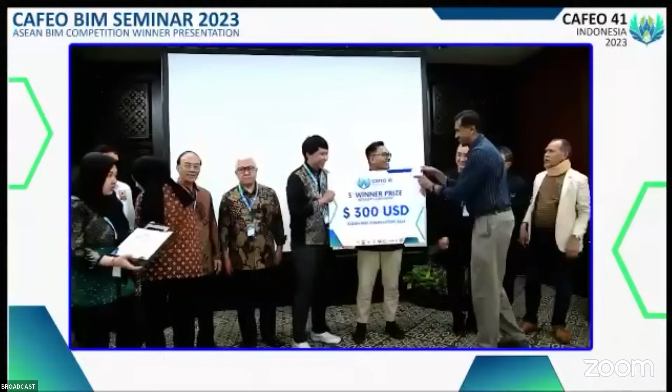Mr. Kesavan, please. The award will be awarded by Mr. Kesavan. Congratulations for PT Pembangunan Perumahan. Please give a big applause for PT Pembangunan Perumahan.

Let us take this moment together. Thank you so much for the project team. You may remain back to your seat. And we will announce the next winner of industry category.

And we also invite Mr. Etim Dwi Yoga as the Vice President Engineering of EPC PT Hutama Karya. It will be awarded by Mr. Kesavan, please. Mr. Firman. Please give a big applause for PT Hutama Karya Persero.

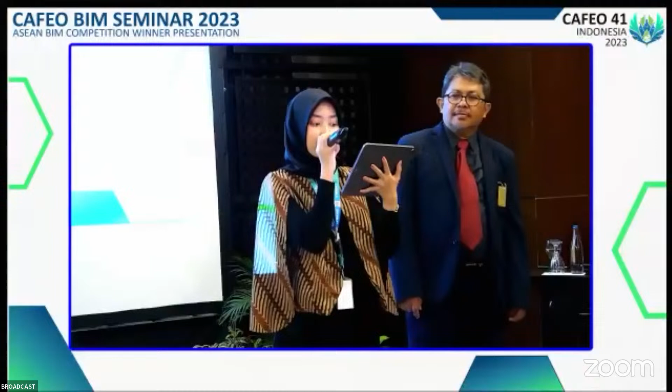And also, I'd like to thank all the panelists for spending your time today and participating in this event. And last but not least, the ASEAN BIM Champion will be celebrated and announced at the inauguration night today at 6 p.m. So please make sure you join the event to know who is the winner of ASEAN Champion.

All right, by now you may leave this room. Thank you so much. And the lunch will be provided in... Okay, and for the lunch, it will be provided in the exhibition hall. Exhibition hall. So please, thank you so much for your participation, and see you.

So for the first winner from HK and also PTPP, you may join the committee because your plaque will be awarded on the night for the first winner. For the first one. It's the first one and the overall. There's one for overall, but we haven't announced it yet.

Untuk panitia boleh berfoto bersama ya dari BK Sipil, PII dan juga HK. Thank you so much. Thank you. Thank you, Pak. Yeah, you got off, but still can.